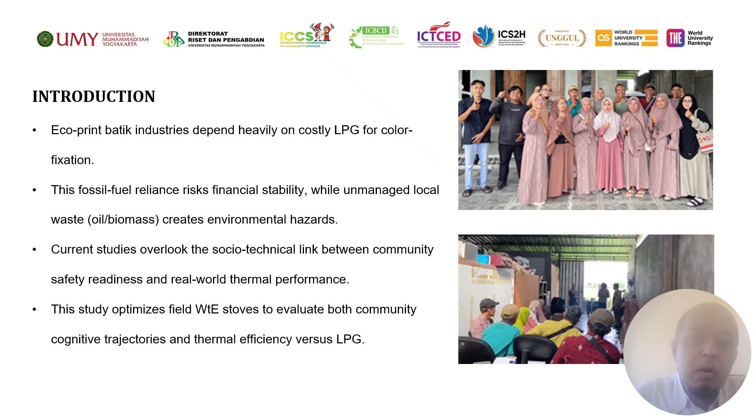To bridge this gap, our study optimizes field waste-to-energy stoves to evaluate both the community cognitive trajectories and their thermal efficiency compared to standard LPG.

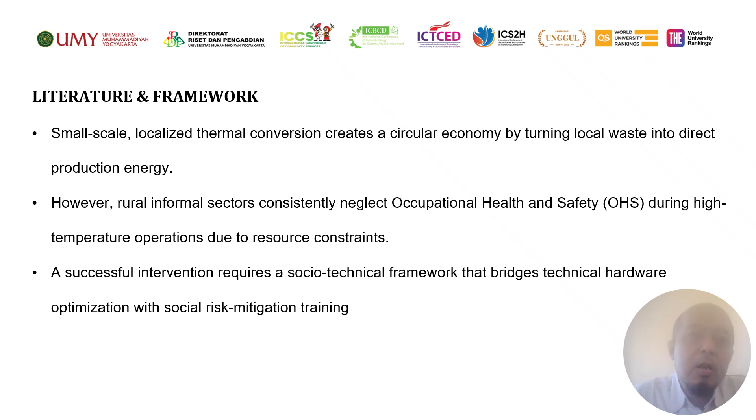Moving on to the literature and framework, we know that small-scale localized thermal conversion creates an elegant circular economy by turning local waste directly into production energy. However, rural informal sectors consistently neglect the occupational health and safety during high-temperature operation, mainly due to the severe resource constraint. Therefore, our framework suggests that a successful technology transfer requires a balanced socio-technical approach, one that bridges technical hardware optimization with social risk mitigation training.

For our methodology, multidisciplinary participatory action research was conducted over 3 months with 14 community partners in Kalikotes village. We tracked two distinct pathways. First, social cognitive readiness was assessed using a 20-question pre- and post-test across 5 target operational domains. Second, technical field performance was objectively measured right on site using the standard water boiling test to calculate macro thermal efficiency and mass balance under real operating conditions.

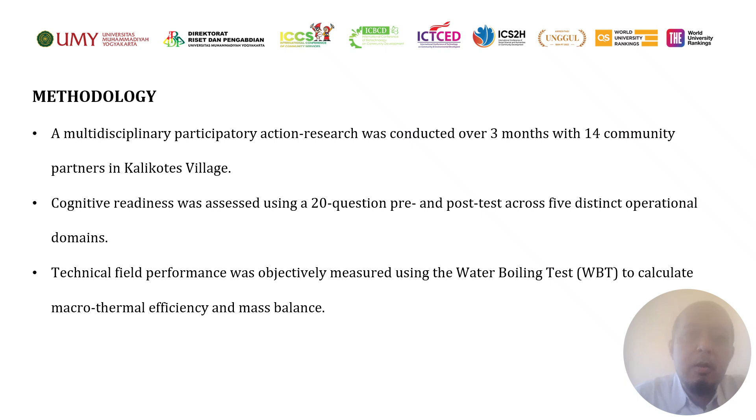Let's look at our first set of results regarding the social aspect. Our demographic data reveals that technology must be highly user-friendly, as nearly 79% of users are over 40 and primarily stay-at-home parents. Post-intervention, overall cognitive readiness improved significantly, with operational technicalities and sustainability perception reaching high saturation scores above 90%.

Conversely, we found an unexpected anomaly. The occupational health and safety compliance dropped from roughly 80% down to 75%, which was heavily driven by persistent misconception about smoke hazard.

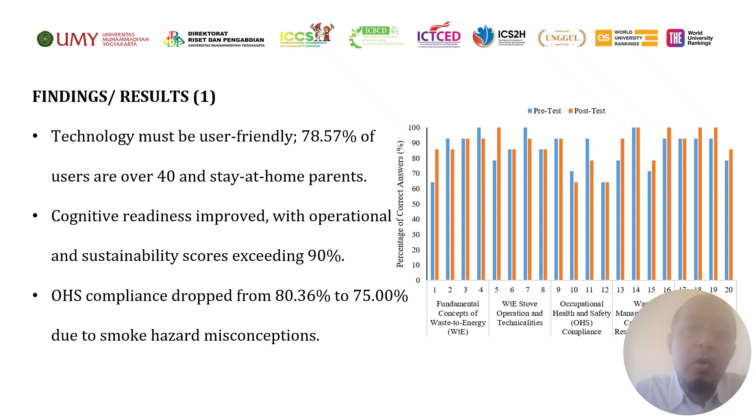On the technical side, the experimental field tests reveal fascinating thermodynamic variation. The forced air waste oil stove achieved the highest field thermal efficiency at 21.92%. In contrast, the commercial LPG baseline dropped drastically to just 12.3% due to severe convective heat loss caused by wind interference in the open-air workshop environment. Meanwhile, the biomass rocket stove yielded only 6.81% efficiency because a significant portion of early heat was absorbed by its own internal structural thermal mass during startup.

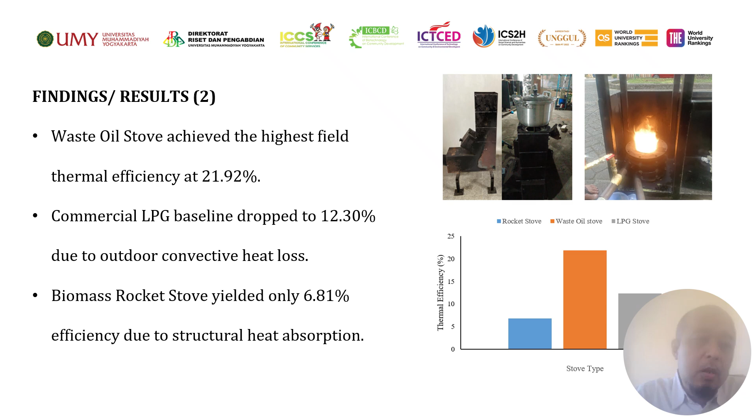As for our discussion, we highlight a clear socio-technical divergence. Participants easily master technical operation but regress in ingrained safety and occupational health safety disciplines, proving that short workshops cannot instantly override old habits. Thermally, forced air waste oil combustion proved highly resilient against outdoor wind interference compared to open flame LPG burners. Furthermore, despite its low thermal efficiency, the zero-cost solid biomass rocket stove acts as a crucial economic buffer, shielding micro enterprises from volatile market fuel prices.

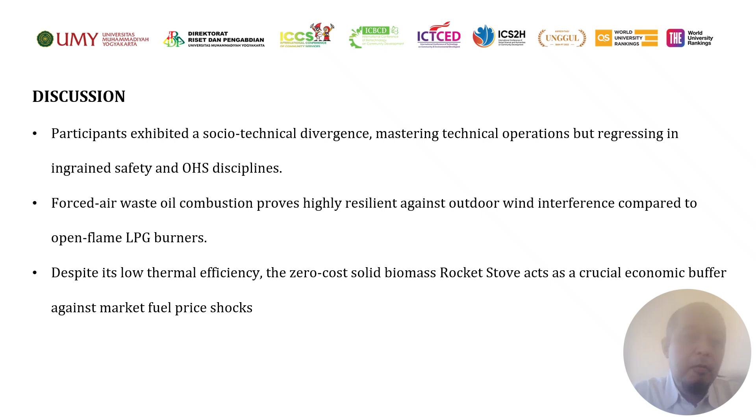This study offers three contributions. Theoretically, it provides an empirical blueprint of the socio-technical interplay during renewable energy adoption in rural settings. Practically, it delivers a weather-resistant, field-tested waste oil stove specifically tailored for the rigors of outdoor cottage industries. Finally, in terms of policy and sustainability, it validates a localized circular economy by directly synergizing village waste banks as fuel providers with ecoprint batik producers.

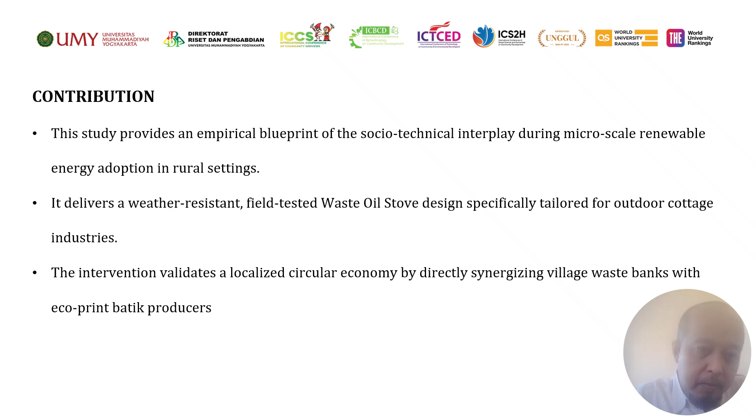To conclude, the waste-to-energy system is a technically and economically superior alternative, with the waste oil stove easily outperforming commercial LPG in real-world settings. However, the social data warns us that 14.3% of users experience an overall cognitive decline, specifically in safety awareness. Ultimately, we conclude that a hybrid energy matrix using waste oil for high-intensity boiling and biomass for zero-cost simmering presents the optimal framework for small to medium enterprise energy independence.

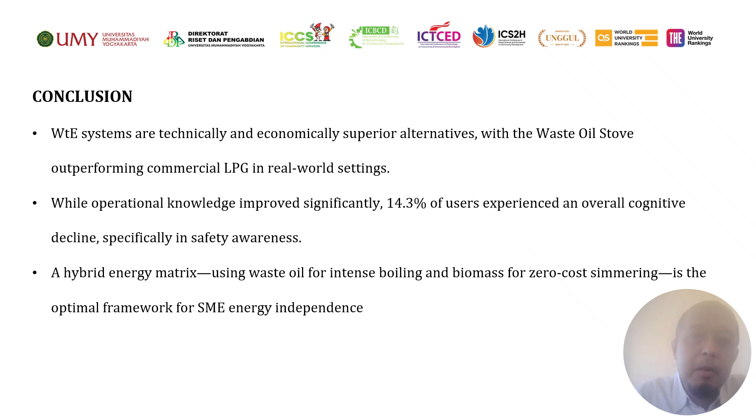Finally, for the implications of this study, first, government technology transfer programs must shift from short-term classroom workshops to continuous peer-led field habituation to bridge the safety gap. Second, localized regulations are urgently needed to safely manage small-scale hazardous waste, specifically used oil and combustion ash. Moving forward, future research should focus on comprehensive emission testing and full life cycle assessment for these optimized waste-to-energy burners. Thank you very much for your attention.